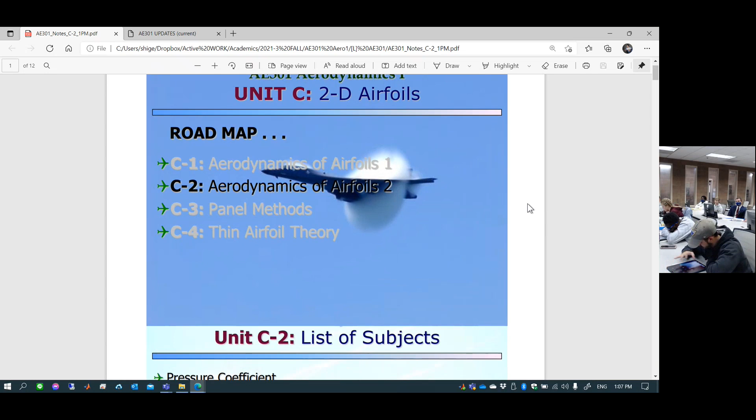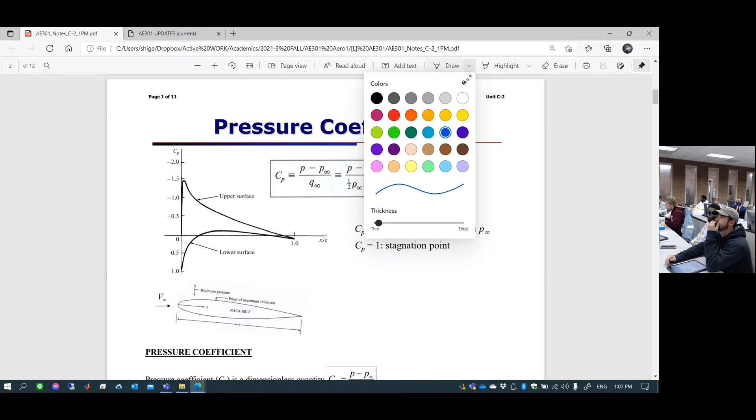Those are essentially what you already know: pressure coefficient CP. You already plotted CP on your project. If you plot CP on an airfoil, the big difference is the leading edge is at x over c equal to 0. In your project 2A, 2B, the leading edge is at minus 1, x over r, so you plot from minus 1 to 1. The chord is 2, that's why 1/2 comes into play, so the equation is slightly different.

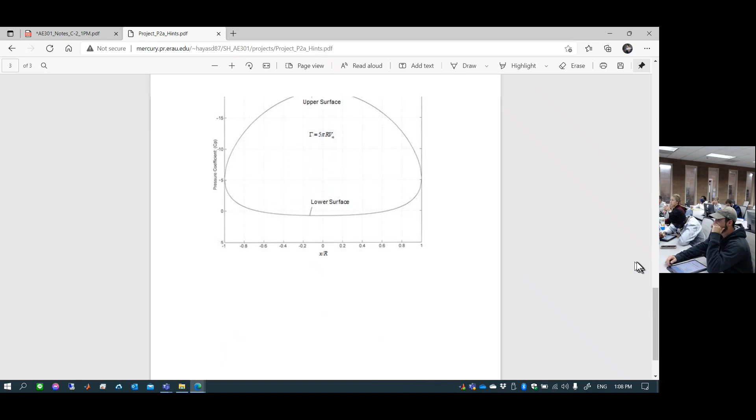I think I explained it in the handout or something, I hope. There's a difference between those project hints. This is just a hint. I used to have an interesting sketch showing the difference between circular cylinder and airfoil. Let's just draw it here.

This is your CP plot, CP versus x over r. You plotted CP from minus 1 to 1, leading edge to trailing edge. The upper surface looks like this, lower surface looks like that. This is the CP for project 2A, 2B, flow over a circular cylinder. Then you determine the area, and this area is the lift coefficient.

The same principle applies here. If you plot the CP distribution over upper and lower surface of a cross section of a wing, called an airfoil, you normalize by chord length. The big difference is the chord length is 2 times radius, so when you integrate from leading edge to trailing edge to determine CL, 1/2 comes into play for that case, but not for this one. That's the only difference. So the CP plot here is at x over c equal to 0 for the leading edge, and 1 for the trailing edge. The area bounded by upper and lower surface is essentially the coefficient CL.

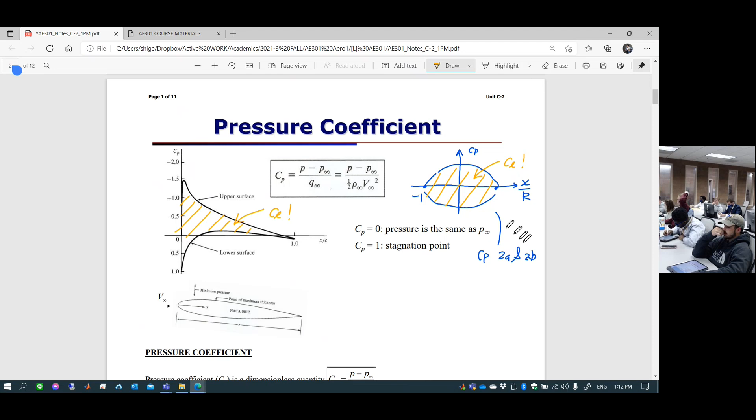That's why everybody in aerodynamics plots CP this way. You can take a closer look by examining the CP.

For the XFOIL special project team, you guys run XFOIL, and the first thing to plot is CP distribution. At the same time you can animate pitch up and pitch down and see how the CP distribution changes, and visualize how pressure, as force per unit area, distributes on the surface as you pitch up and pitch down. I hope you bring that into class and demo.

You can take a close look starting from the leading edge. Right at the leading edge, it looks like CP equals 1.0 - that's the stagnation point. Then you trace over the upper surface and observe the pressure gradient. Suppose CP decreases really fast, crossing zero and going more and more negative - is that good or bad for lift? Everywhere you go, pressure goes down - is that good or bad? It's really good, it's like cycling between very high and very low pressure. But if, as you move on the surface starting from the leading edge, pressure decreases rapidly and smoothly, this is a very favorable pressure gradient.

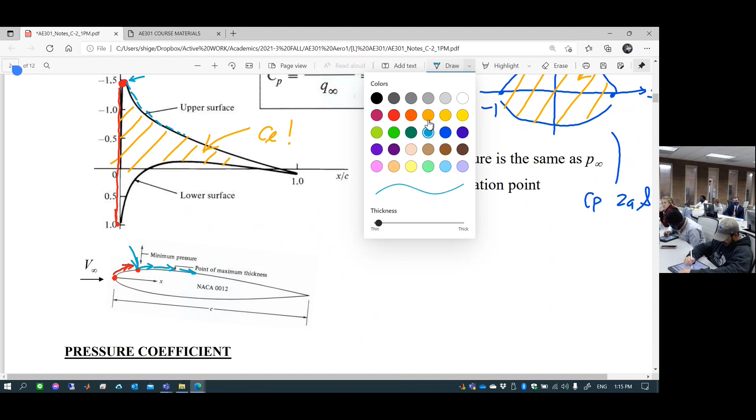And then if you run XFOIL, XFOIL actually predicts the transition. Transition happens around here. The thickness of the boundary layer changes, and the CP distribution changes also. It's transition from laminar to turbulent.

Because of the adverse pressure gradient, you have a difficult time. You have to transition from laminar to turbulent, trying to stick on the surface. However, oftentimes, depending on the contour, if it's too adverse, you have to separate from the surface, temporarily reducing your pressure.

But in this case, it looks like it stays attached all the way to the trailing edge, another stagnation point. Now, obviously, the area of negative pressure, that means this is the area of negative pressure, isn't it? The area of negative pressure is this region.

So this much surface is lower pressure. How much lower? Lower than local atmospheric pressure. So P is less than P infinity. It's like a vacuum spot, a spot lower than local atmospheric pressure is formed.

Now, how about the other side here, close to the leading edge, maybe around here? This is higher pressure, right? Higher P, in other words, pressure is more than local atmospheric pressure. So you create a higher pressure zone around here, and on the upper side, you create the lower pressure zone all the way here. As a result, net force, lift.

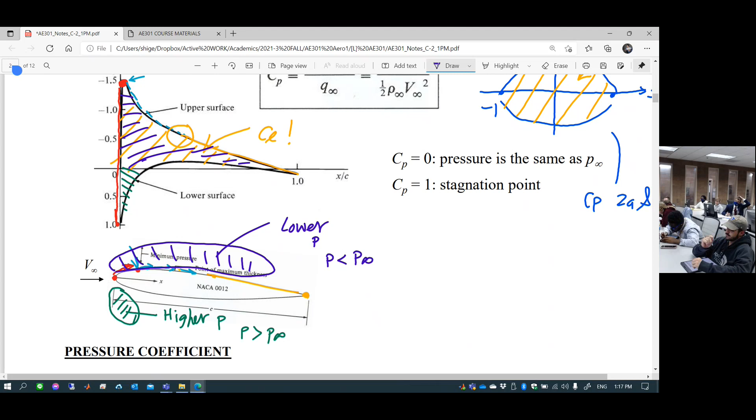So lots of things you can read off right from the CP plot. CP plot is usually the first thing to come up when you try to design and analyze your cross section. So XFOIL is an awesome tool, you can visualize everything.

CP keeps changing as you pitch up and pitch up and pitch up, and pitch down and pitch down. It just keeps changing, and as a result, the resultant force acts at different locations. What is that location, by the way? Center of pressure.

Center of pressure. Okay, the resultant is at the center of pressure. So if you take a location right here where the pitching moment is zero, that's the center of pressure. Usually the quarter chord aerodynamic center moment is constant. Do you remember those things?

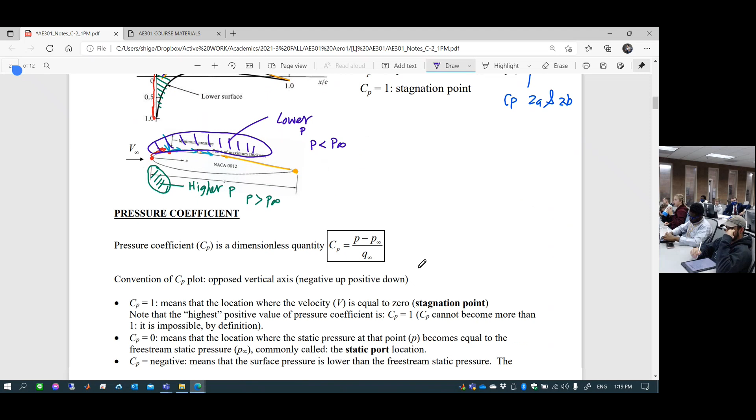Anyways, let's move on to the next page. This demonstrates what you need to be doing in the wind tunnel. Let's take a look at the picture here. Wind tunnel picture, I have to pick it up, like old. Okay, wind tunnel, so let's remember this.

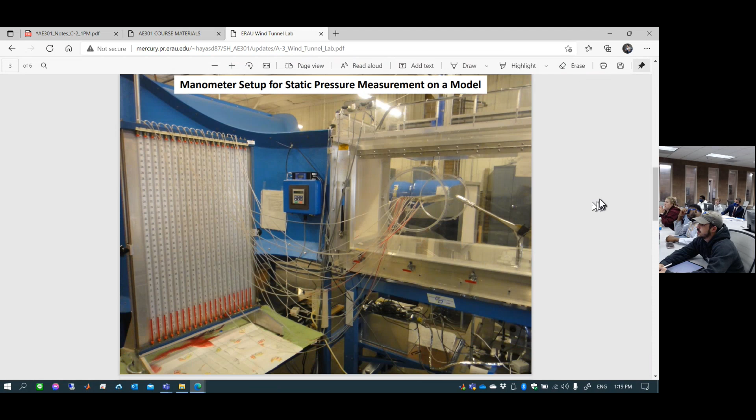So this is a low-speed wind tunnel testing. It looks like you have tons of pitot tubes connected to the surface pressure taps. So what you're doing is you turn it on, and obviously the surface static pressure change happens.

What's that? This is the upper surface, kind of like this. Have you seen that kind of distribution in the previous page? Yes. Right, if you connect up all the lower surface pressures, it's going to be, yeah. So you can read off the surface pressure distribution by using this kind of setup.

So you can sort of determine pressure distribution just like that, depending on the angle of attack. It just keeps changing. And then the pressure measured at the pressure taps is determined and converted to CP. You have to.

So let's do a simple practice. This is the pressure distribution you measure using pressure taps. This is going to be converted to CP, and then you plot the CP distribution for upper and lower surface for each angle. Integrating from leading edge to trailing edge gives you CL. In other words, the area is CL.

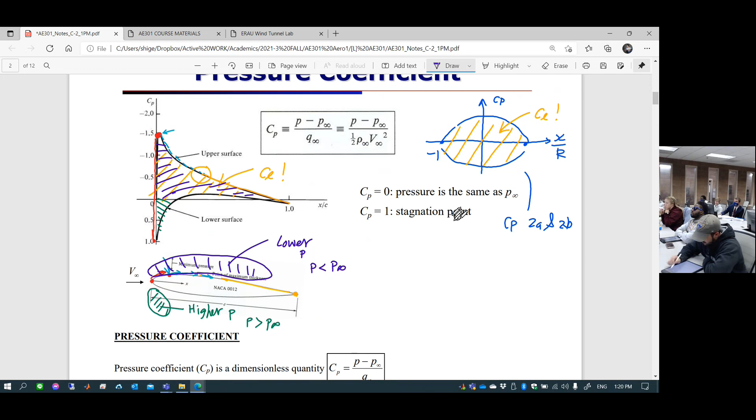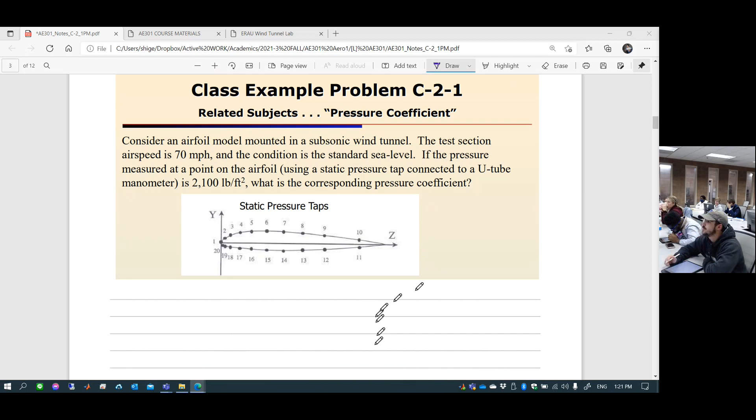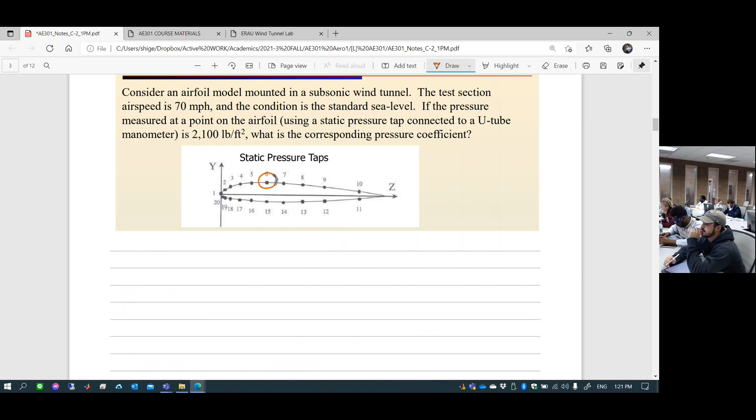Okay, let's take a look at a practice problem. Consider an airfoil model mounted in a subsonic wind tunnel. The test section airspeed is 70 miles per hour, and the condition is standard sea level. This is wind tunnel testing. If the pressure is measured at a point on the airfoil, I don't know which point, let's say around 6.

You measure this point, and the pressure happens to be 2100 psf. What is the corresponding pressure coefficient at this point? Again, I'm just guessing here. You have to measure the pressure at every location of the 20 static ports and convert every location to CP anyway. So let's take a look at one of the points here.

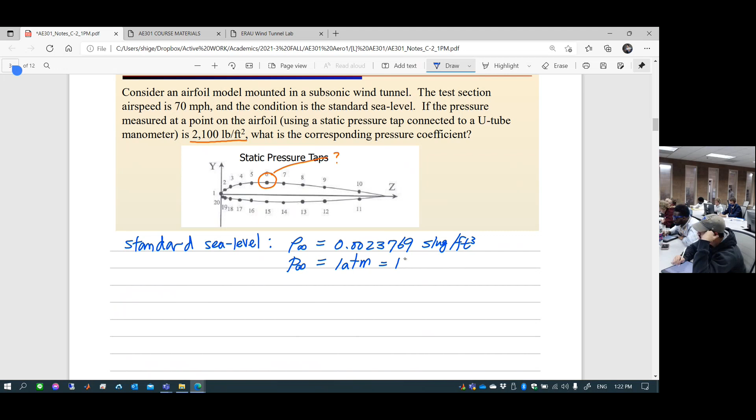So let's begin with the test condition, standard sea level. Density of air is 0.0023769 slugs per cubic foot. Pressure at 1 atm at standard sea level is 14.7 psi, which is 2116.2 pounds per square foot.

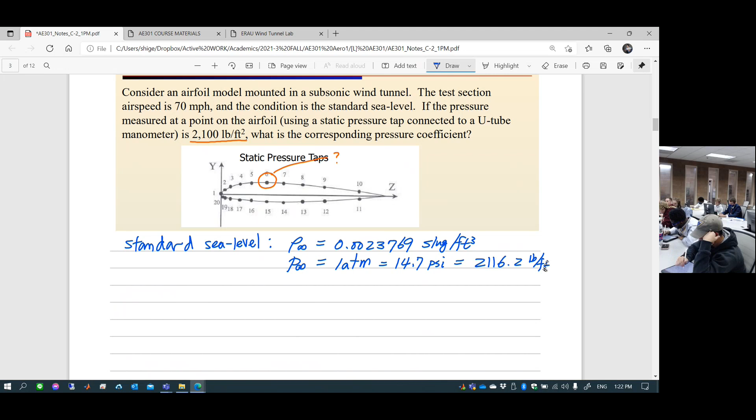Standard sea level. Also, I'm going to convert 70 miles per hour, multiplied by 88 feet per second divided by 60 miles per hour. This gives you 102.667 feet per second. That seems a little slow. Yeah, 70 miles per hour. Your car can probably run faster than this.

Low speed wind tunnel. So dynamic pressure of the free stream is 1/2 rho V squared. Density is 0.0023769 slugs per cubic foot, velocity is 102.667 feet per second squared. So dynamic pressure is 12.527 psf, pounds per square foot.

Okay, so now you can determine CP. CP by definition is the measured pressure P at this location, minus P infinity, the test condition free stream static pressure, divided by Q infinity. Plugging in: measured value 2100 psf, standard sea level static pressure 2116.2 psf, divided by 12.527 psf. This gives you CP equals minus 1.293.

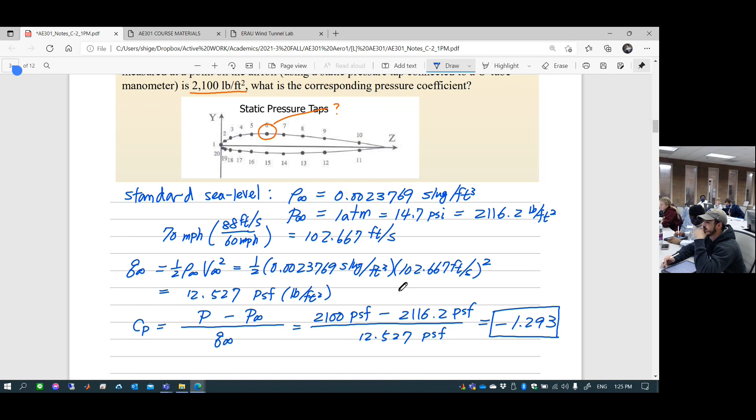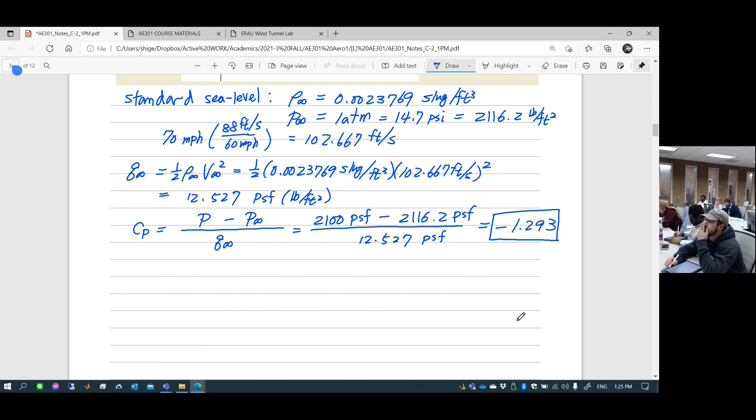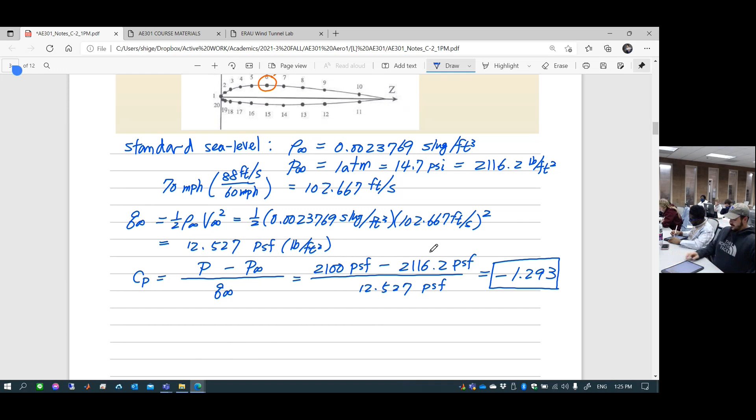If we were given a problem like this on an exam, maybe the final... I don't know, this is like a joke. This isn't an exam problem, I don't know what you'd do. You don't need to study anything, you can pick anything. You gave us derivation problems on the last exam, so I don't trust anything now. I'm just kidding. My exam is essentially almost all cut and pasted from whatever problem we did in homework or class. This could be one of them, but it seems too easy. That's okay. I'll think about it. Well, you are better than that - anybody can solve that. You have to do this in the wind tunnel anyway, so that's why I'm showing it, but you're better than this. Anybody can do this.

Anyway, next page. So this is just a demo of how to convert measured pressure to CP, and then you plot CP - negative value in positive y direction. Those are very basic stuff of aero. So if you see people not doing those, point the finger and laugh at it, because that is aerodynamics. It's quite important - people actually don't know this very basic stuff.

This is very lethal when you're trying to work as a team, starting from now. Okay, go ahead, question. So CP negative, CP negative, yeah.

On the top, not necessarily. If you do this, you got CP negative here. Depends. But if this is a zero angle of attack, it's probably around here, because the shape allows you to accelerate.

CP negative means pressure is lower. CP zero means pressure is equal to the free stream static pressure. That's a cylinder. So when you make a drill hole at CP equals zero, that's a static hole.

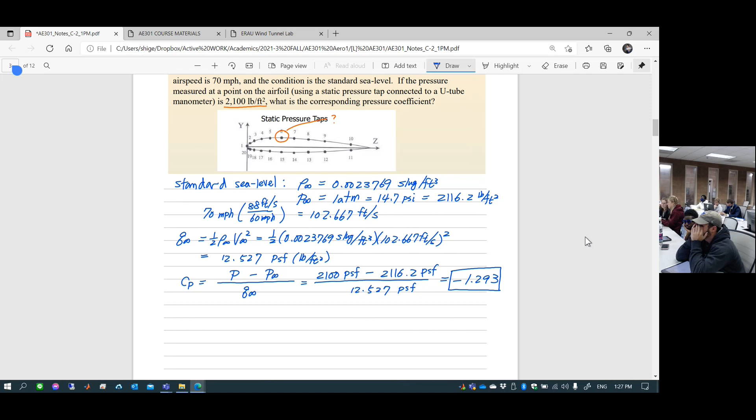All right, next page. So basically what you do is obtain lift from the CP distribution. This is something you already did on your project 2A to B.

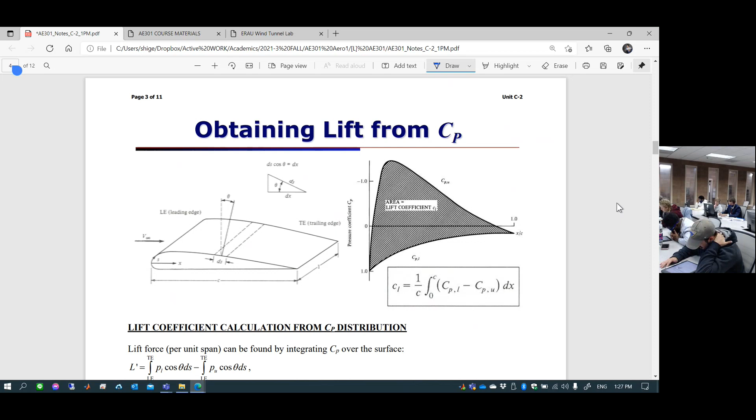You are given CP distribution for the upper and lower surface as a data set. You can numerically integrate to determine this area, creating this tiny strip, another strip, another strip, another strip. That's going to be the area.

Is that something you did? Project 2A to B. I hope so. What do you call that kind of method? Trapezoidal integration.

Trapezoidal. The question is, if I give you a data set and ask you to numerically integrate using the trapezoidal method, can you do it? Like with 5 data points upper and lower surface, go ahead, finish up this table. I heard yes. It's going to go on the exam, so yes.

Trapz, MATLAB, trapezoidal integration method. Actually, this is numerical. I'm not going to do that unless you've seen a similar homework.

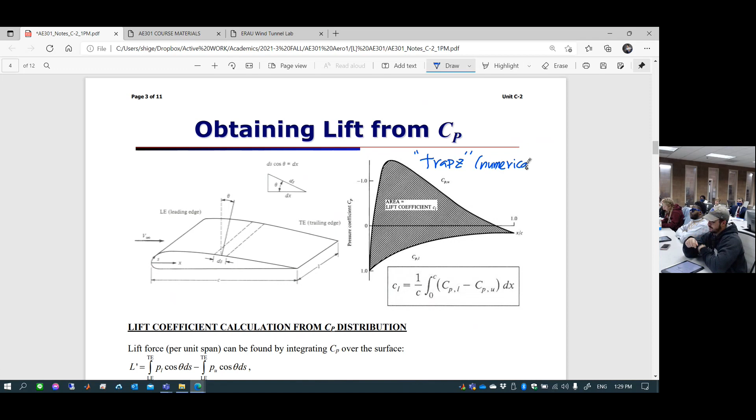Did you see similar homework? Yeah. Oh, if so, yeah, too bad. Which one? C2 to A. Let's take a look. C2 to A.

Ah, okay. Oh yeah, of course you can do this. You already did it in your project. It's the same thing. Okay? Project, like I said, circular cylinder, data set is minus 1 to 1.

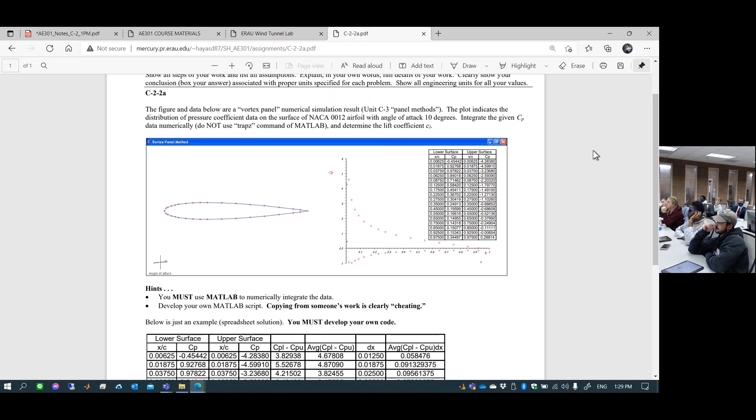One part comes out, this one, there's one. No, one part comes out. So you can finish up this table. Actually, solutions are given. What's going on here?

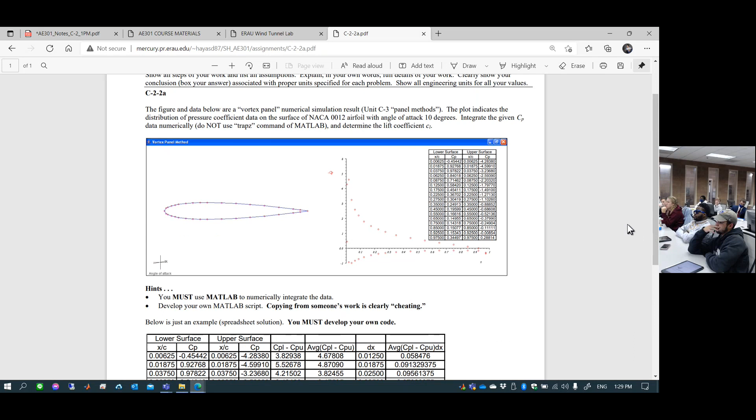Well, you said this is an example solution. This is examples. Oh, you're going to do the same thing in MATLAB. Yeah, that's easy. But we won't have access to MATLAB for the final.

That's right. So that means, suppose if I erase out a portion of this table and ask you to fill in, can you do it? Yes, you can. I mean, it's not like this much data, maybe a coarser set of 5 data points. Then I say, here's the lower surface, upper surface data set given. Go ahead, find out, see if you can do it.

It's all about this hint, right? Here you go, so this is it. Now that's what you're doing. Same thing: instead of 1/2 integration from -1 to 1, you're going to do 0 to 1, no 1/2.

The same equation. Okay. Yeah. Nothing to worry about, you know that. Okay. Is that because it's no longer a cylinder that we're getting rid of that 1/2?

No, it's because it's going... sorry, -1 to 1, so this is 2. Yes, close, because that's you're adding... 1/2. Yeah, so if you get rid of that, then you would go from 0 to 1, and then you don't need the 1/2.

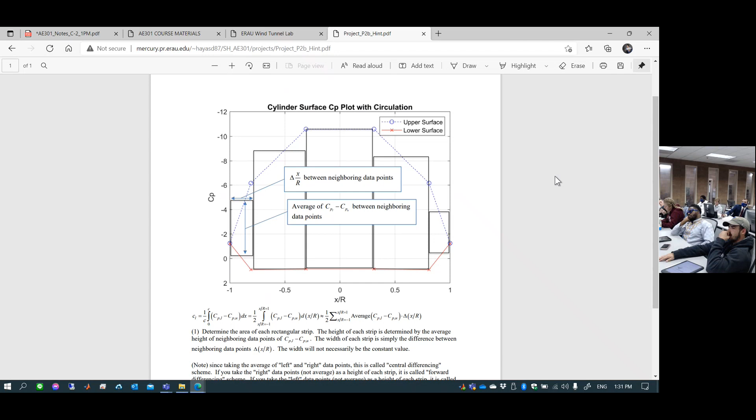In other words, you are normalizing with the 1/2 chord, that's why. Okay, so for now we're just doing the airfoil, this is x over chord length. Right, so and now since we're doing it with dx, that's why it's okay. Yeah, that's right. Okay, that's right. So the equation doesn't have 1/2 in it.

Integration is from 0 to chord length, or in terms of normalization, x over bar is this, okay? Right? Okay good. Well, of course you know. So for the circular cylinder, what is the equation?

For the circular cylinder, this is 1/2 integral from -1 to 1 of CPL minus CPU, dx over bar. Then x over bar is defined as x over radius. Okay, chord length is 2 times radius. That's what you did, this is the circular cylinder equation.

You already know this. This is the equation for the airfoil. It's the same equation, it's the same thing. Okay, by the way, this is quiz 7.

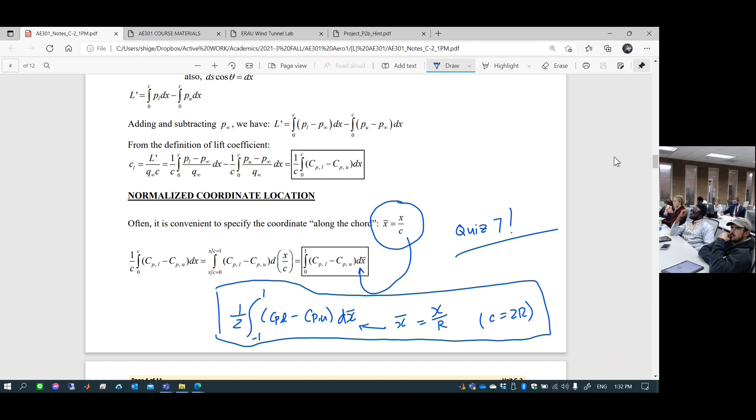All right, so again, quiz 7. Take a look at the handout. Handout B3B, B34, B4B. The handout actually tells you all the details of the mathematics.

This handout covers the flow of a circular cylinder. If you apply the same mathematics to the flow of an airfoil, you can easily do quiz 7. Quiz 7 is essentially an airfoil problem. B3B, B4B are flow of a circular cylinder. The only difference is the normalization based on radius, where radius is half of the chord. Any question? This is the only difference: chord and radius. Okay, so you can do it.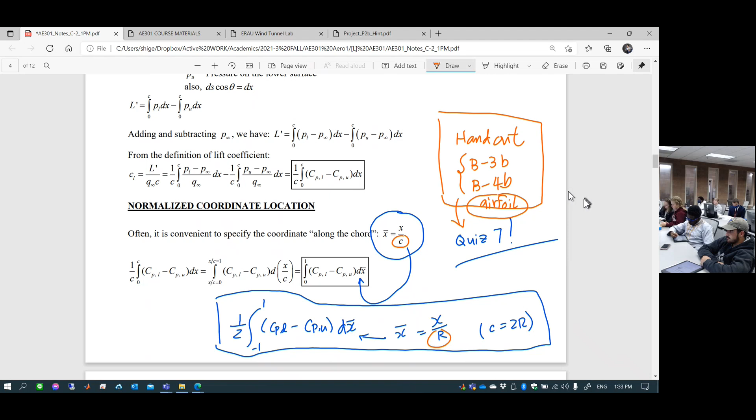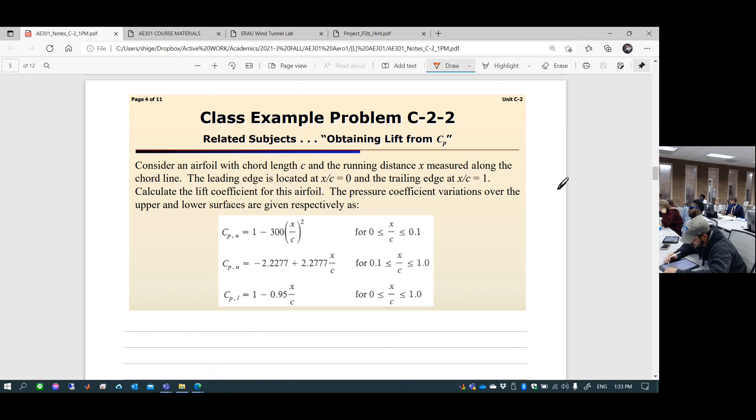So next page, let's take a look at class example problem C22. Consider an airfoil with chord length C and running distance x measured along the chord line. The leading edge is located at x over c equal to 0. Like I said, x over c is equal to x over bar, normalized x. Trailing edge is equal to 1. Calculate the lift coefficient for this airfoil. The pressure coefficient variations over the upper and lower surface are given.

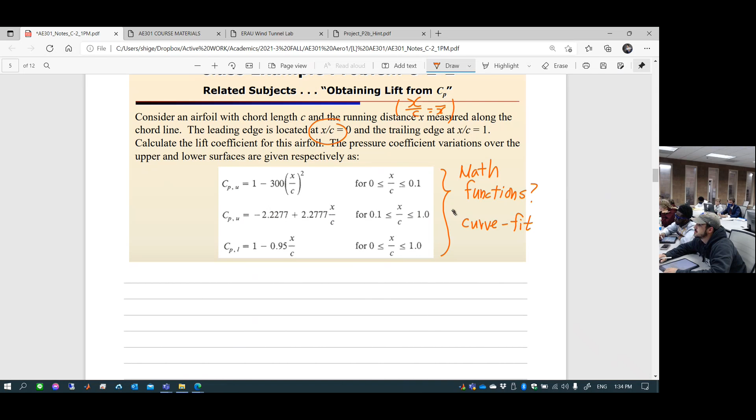So this is, how do you get these math functions? Piecewise? This is a curve fit, isn't it? Yeah. So you have to understand there are distinctly two different types of integration of the data points.

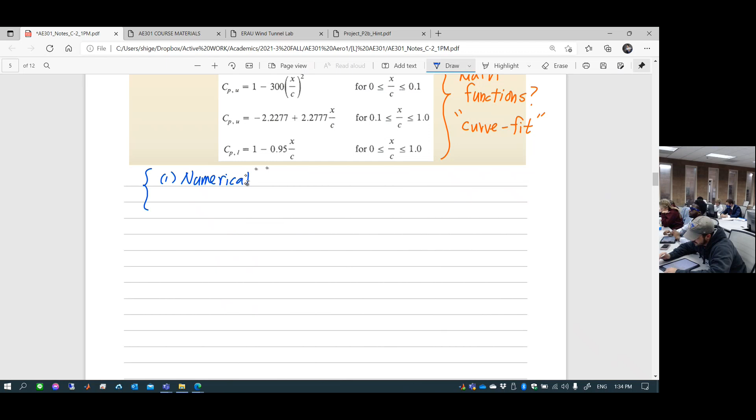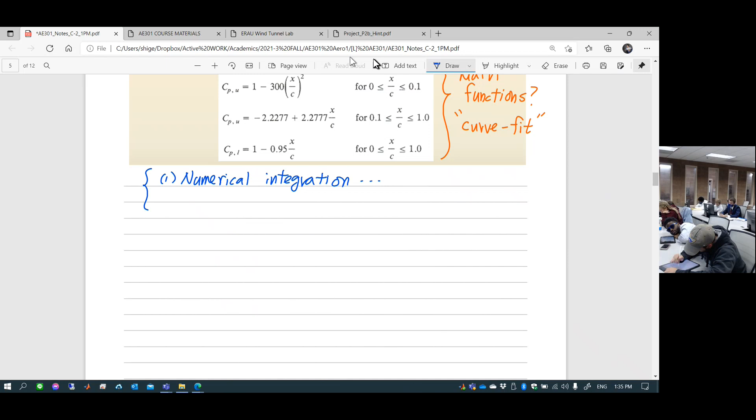One is numerical integration. Numerical integration really is trapezoidal, that's that one. Homework, go ahead. The curve fit is where you tell the computer, I think the equation will be some general form like this, best guess, give me your best guess as to what the constants are. Yeah, well, several different kinds of curve fits. Of course, you have to specify polynomial, spline fit, exponential, linear, what kind of equation it will be. Yeah, that's right, what kind of equation actually best fits the data set. That's the curve fit.

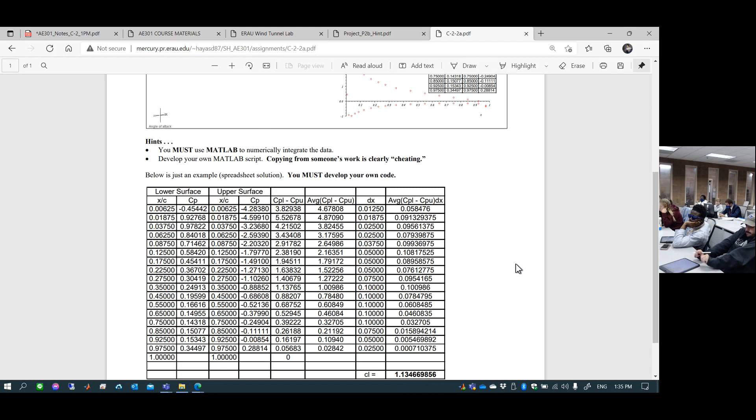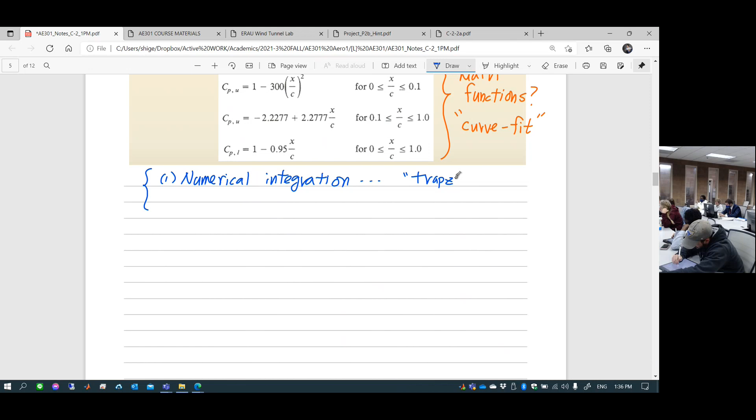So this is numerical integration. In other words, those are the lower surface, upper surface CP given as a data set. You're going to use the data as-is to determine the area bounded by those two data sets. This is called the numerical integration method, something you did in project 2A, 2B. Okay, now here's the other one, MATLAB trapz method.

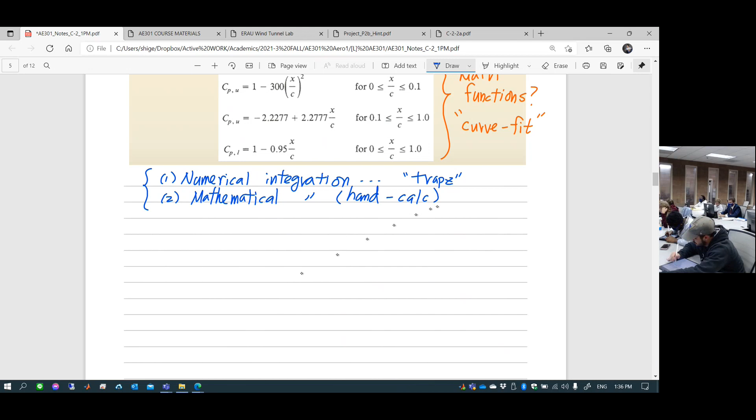The other one is mathematical integration. This is more or less like a hand calculation, and you can possibly do this hand calc. So here's the situation: you are going to actually plot CP. Let's say this is the upper surface CP data set given, I don't know how many data sets given, and this is the lower surface data set.

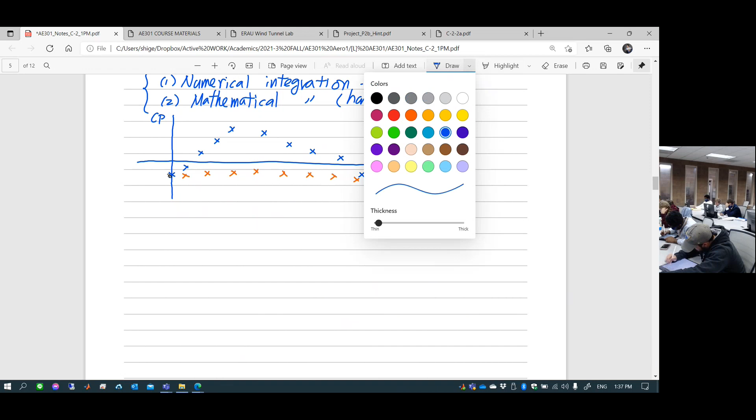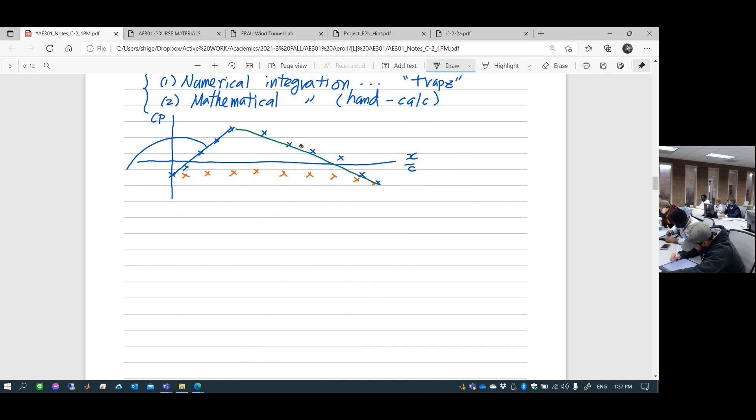So what you're going to do is a curve fit. First, upper surface curve fit, and then upper surface curve fit in this range. So two different ranges of the upper surface need two different functions to curve fit. So this is CPU, range-wise 0 to let's say 0.1, okay? This is the CPU in the range 0.1 to 1.

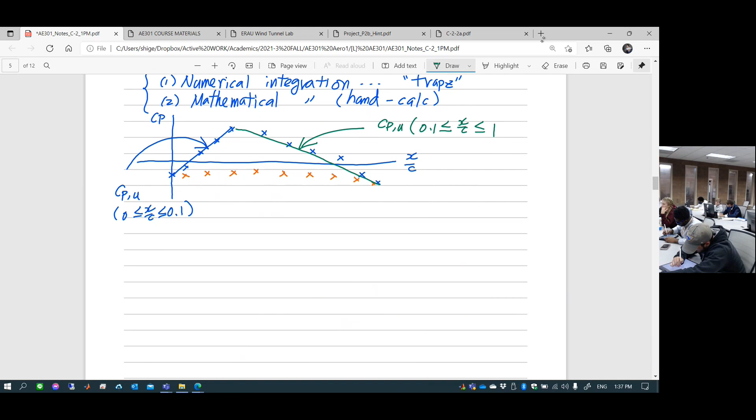Okay, lower surface happens to be just a single equation to curve fit: CP lower is 1 minus 0.95 x over c, for the entire range. So it happens that the upper surface needs two functions to curve fit. This could happen. So that is the situation here—these are the mathematical functions given based on the curve fit of data.

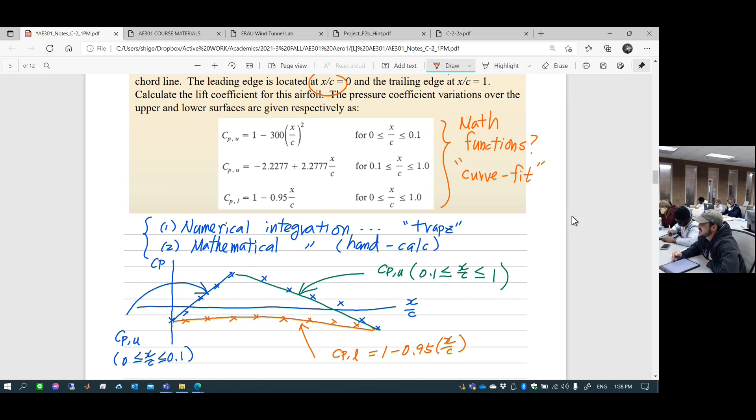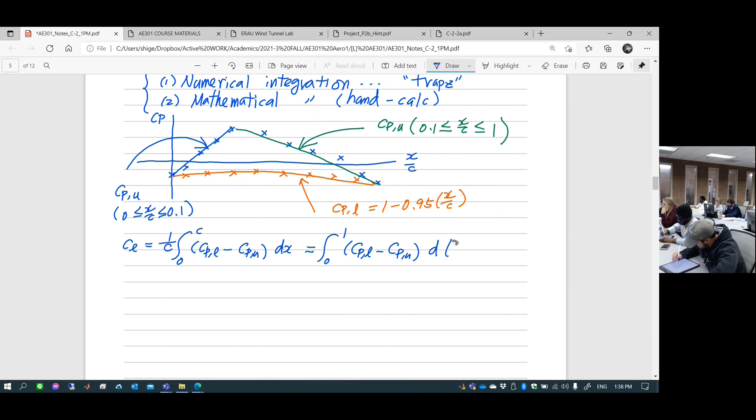So under such a situation, how can you go ahead and mathematically integrate by hand? You are going to do this: CL is equal to 1 over C integral from 0 to C of (CP lower minus CP upper) dx. In normalized coordinates, this is essentially the integral from 0 to 1 of (CP lower minus CP upper) dx over C, where x over C is often called x bar, the normalized coordinate. So mathematically speaking, you are going to represent CP upper with two functions, and CP lower with a single function.

So this is the integral from 0 to 1 of the lower surface, 1 minus 0.95 x over c, dx over c. This is the lower surface. And then minus the integral from 0 to 0.1 of (1 minus 300 (x over c) squared) dx over c, minus the integral from 0.1 to 1 of (minus 2.2277 plus 2.2777 x over c) dx over c, in which you write out the hand math.

So this is x over c evaluated from 0 to 1, minus 0.475 (x over c) squared evaluated from 0 to 1, minus x over c evaluated from 0 to 0.1, plus 100 (x over c) cubed evaluated from 0 to 0.1, plus 2.2277 x over c evaluated from 0.1 to 1, minus 1.1388 (x over c) squared evaluated from 0.1 to 1. If you do all the hand mathematics, it's 1.4. This is CL.

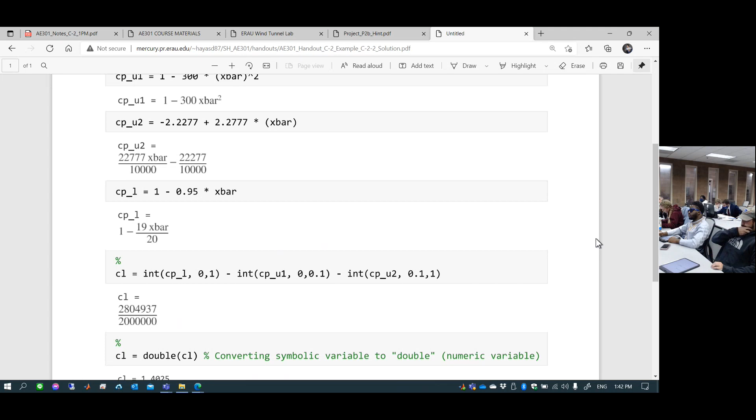At the very end, you're going to actually combine it. I guess you guys do it in dynamics or something. It's a piece of cake compared to dynamics, there's nothing to it.

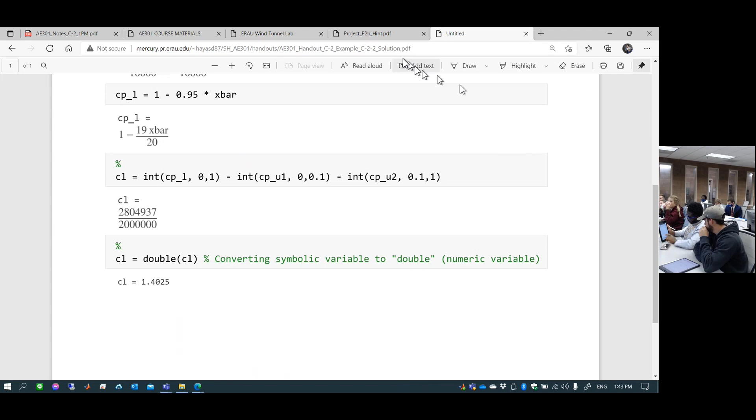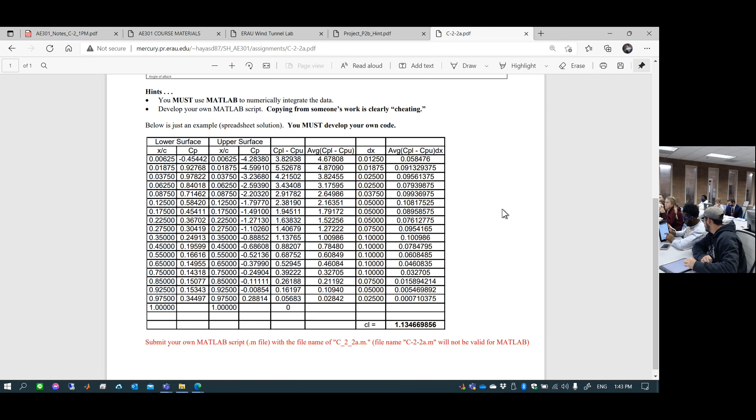Go ahead. In the example problem we just did, we are given functions for CPL and CPU. In the homework problem, C22 I believe, are we given those functions? This thing is a numerical integration - in other words, you're given data and you numerically integrate it.

Now suppose if you plot this CP on Excel, and then curve fit and squeeze out the function, you can do the mathematical integration by hand. So you have two different methods. This is a numerical integration, you basically go ahead and do that. But suppose if you want me to create such a problem, I'm going to use Excel to curve fit, express two functions for upper and one function for lower. Functions given, go ahead, finish up your integral by hand. You still probably...

Network's dead. Hold on, something went wrong. Trying to get you back into the meeting. Hold on, connecting. Well, yeah, it's okay. Well, no, it's online anyways, but recording may be disrupted.

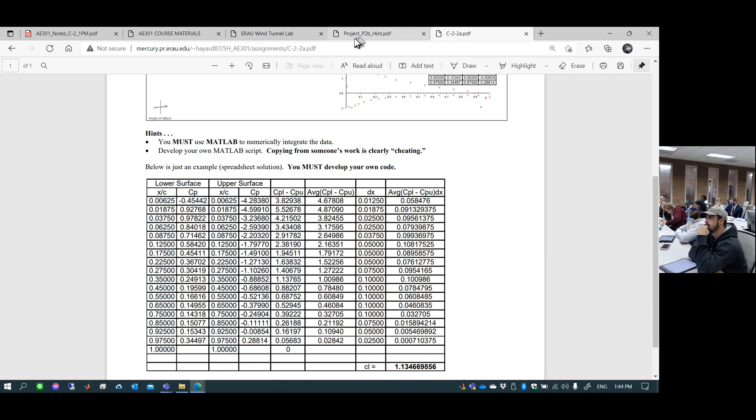So this is the numerical integration, and things I showed you earlier is the mathematical integration - this is like a classic method when you don't have access to MATLAB, you do everything by hand. But anyway, at the very end you pick up MATLAB for symbolic math. So two different approaches: one is numerical, one is mathematical integration. So on the final, since we obviously won't have access to MATLAB or Excel, it would be something similar to this rather than the homework problem, if you want me to create this kind of thing.

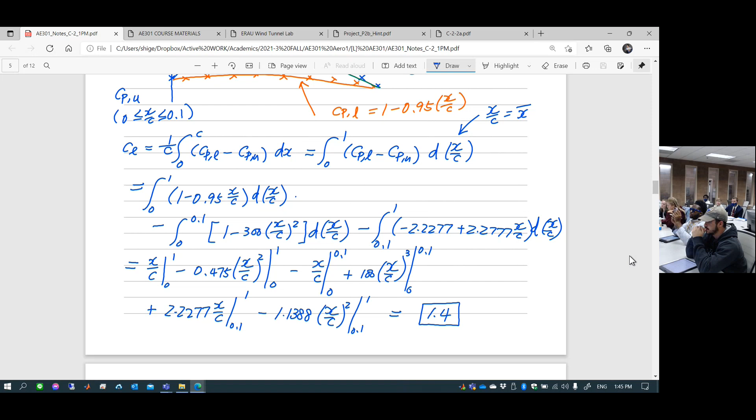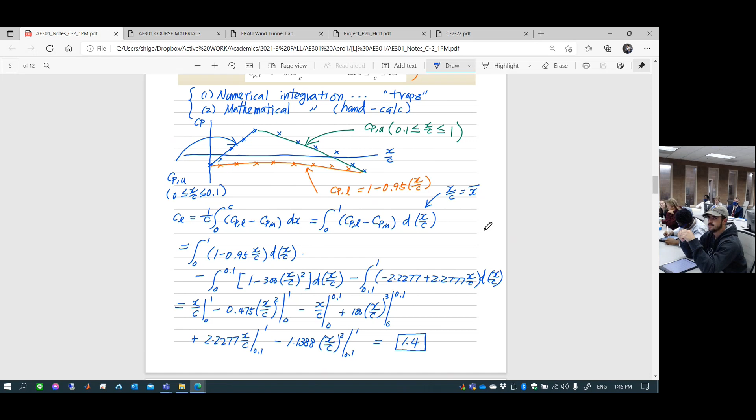Please don't, please don't - I was speaking purely hypothetically. When we ask you a question, it's not that we want you to do this. My overall impression is, this is Aero, which is an engineering class, not a mathematics class. So I'm not interested in a problem which requires heavy use of math, because that becomes a test of math, not aerodynamics. But I would probably heavily emphasize the concept of what you're doing - that's something I like to test more.

Question, go ahead. So what's that number next to x over c cubed? X over c cubed, 0 to 0.1 - what's the coefficient? It's 100. 100 times x over c cubed was the question. It should be 100. Yeah, it should just be 300 divided by 3. So this is 100 times x over c cubed, evaluated from 0 to 0.1, that's what it is.

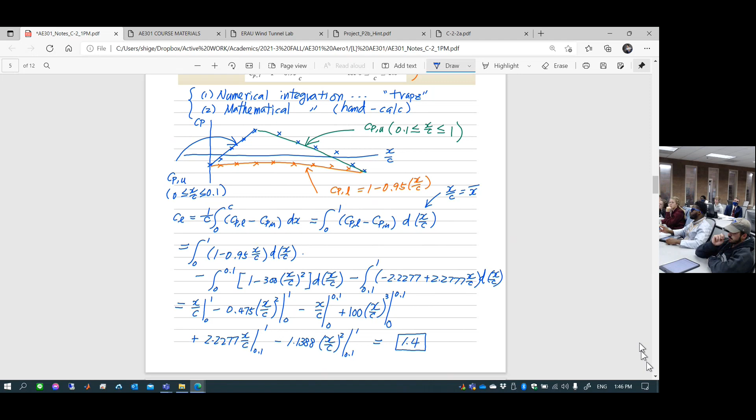Although I'm not interested, because I will use MATLAB anyway. I'm very less interested in those details. I'm not a mathematician, I never do this kind of math anyways nowadays - I use software and symbolic math.

So let's stop here today. Next class we are going to pick up high speed 2D airfoil aerodynamics, which is critical Mach number. This is actually quite important - MCR, critical Mach number, is one of the design factors for high speed airplanes. Critical Mach number, then drag divergence, and then supersonic speed - we are going to cover a little bit of that. Any questions?